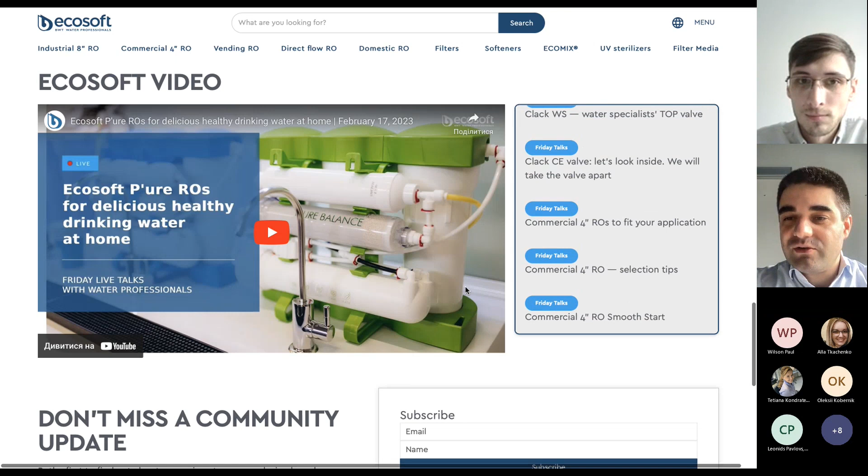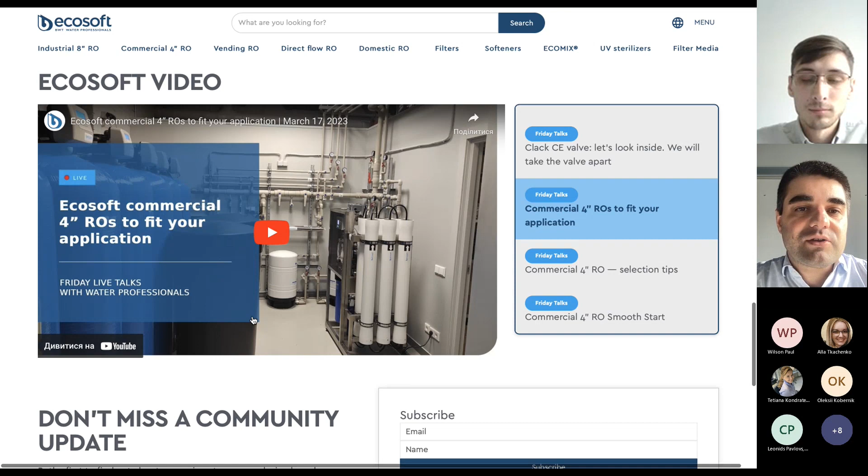Also, we talked a lot on the commercial 4-inch ROs, and you may actually watch these videos here. So this is for your convenience. If these topics are of your interest, you may easily check them out here.

Last time we also talked on the Smooth Start product, so this video will be uploaded soon. And today we will talk on the Robust product line, and I will briefly remind you what the product is. We sometimes also call Robust the direct flow ROs.

If you go down a little bit deeper in the web page, you will find all the family here. The flagship product of this product line is the Robust Pro. This is the product designed to improve the taste of coffee. This is the reverse osmosis filter with special mineralizing technology, which provides calcium, magnesium, and hydrocarbonates to the water. These three minerals help to improve extraction of tasty coffee compounds from the coffee beans. This is a super product that also meets the requirements of the Specialty Coffee Association, and it's the best choice of the barista.

Then we have Robust 1500. This is the product for cafes and cafeterias. Then we have Robust 3000, the product for large restaurants. We also have Robust Mini, the product for small cafes and also for areas with a limited budget, but they want to have enough water for coffee brewing and for tea.

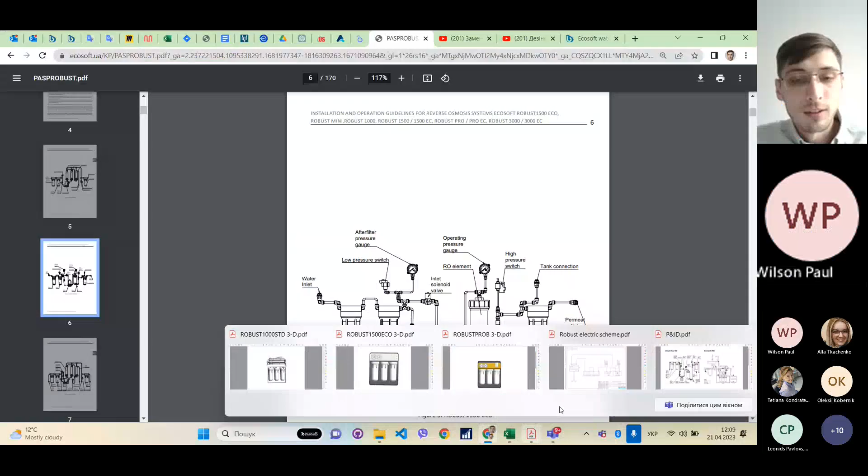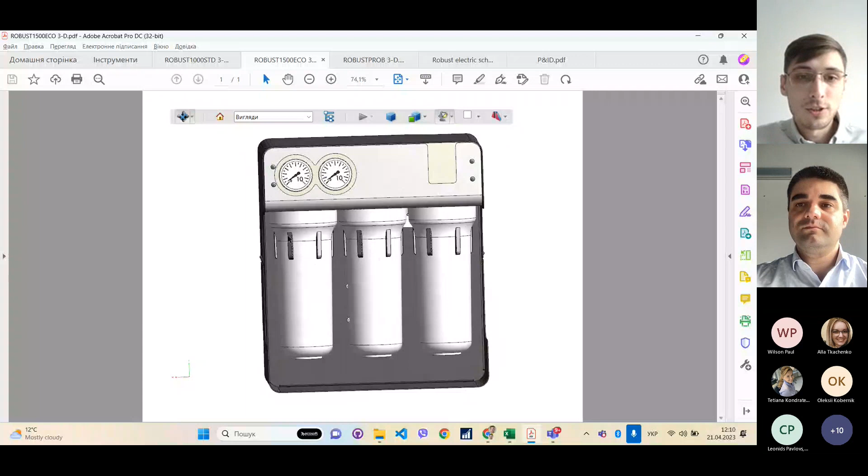So what is the product, what is inside the product? I would like to show you the 3D model where we can view all the components of the system. In the Robust system, we have pre and post filters on the front of the system and pressure gauges. The system also has a more powerful membrane in comparison with domestic RO, and a pressure pump. On the top we can see the connections for pure water, drain, and pressure tank.

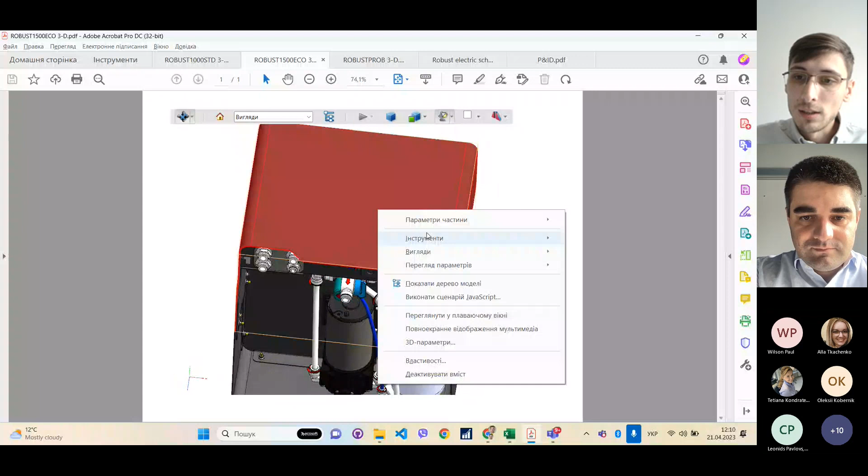For example, let me show you the top of the system. Alex, I will be interrupting you and asking some small questions.

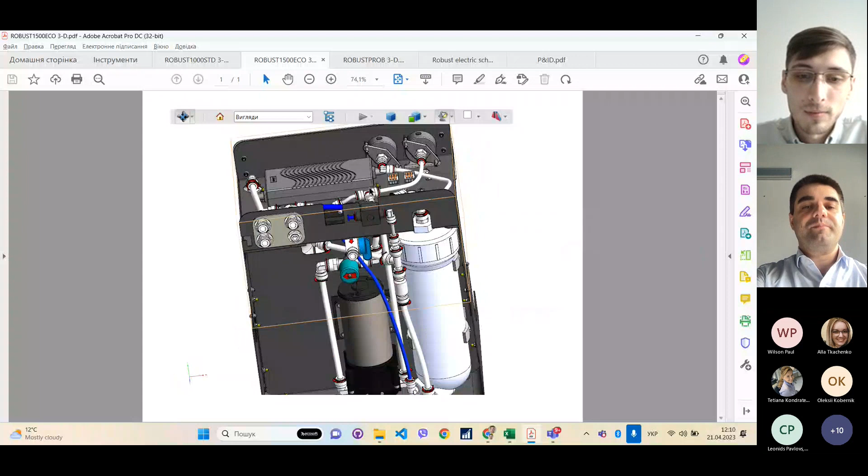Can you tell us what kind of membranes are used in Robust products? In Robust products, we have a 500 GPD membrane for the Robust Pro model, for Robust 3000, and for Robust 1500. These membranes are more powerful and give us more flow rate.

If we compare this direct flow filter with domestic RO, we can install this filter without the tank if we need to supply water to the consumer just for drinking. But if we install the system in the kitchen and need to connect the Robust to other equipment, for example a coffee machine or ice machine, we need to add an additional pressure tank and connect it here.

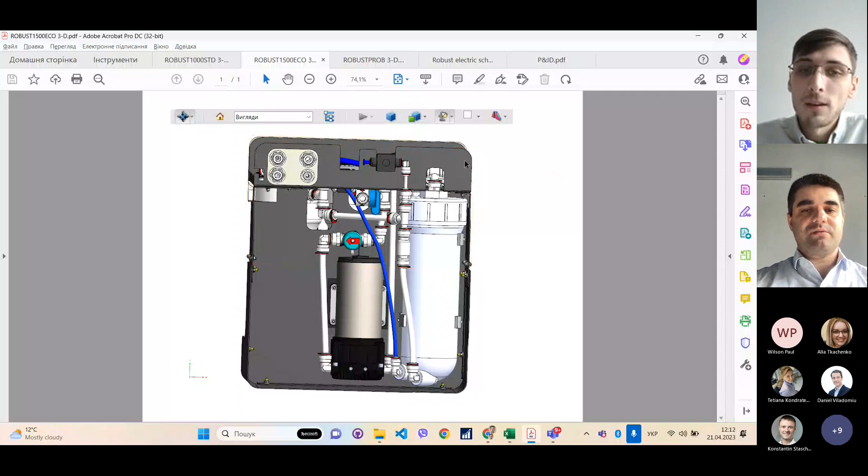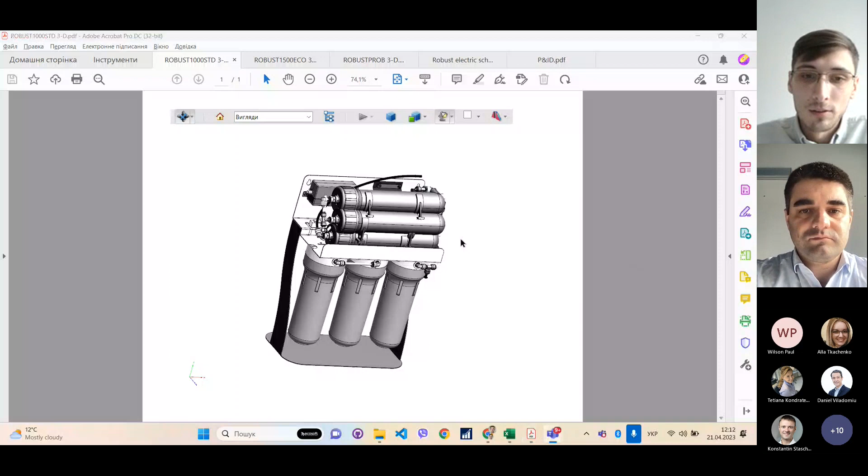What kind of membranes do you use in the Robust Mini? In Robust Mini, we have 3 membranes with 100 GPD flow rate each vessel. The first two membranes are installed in parallel, and the third membrane is installed after the two membranes. The flow rate of this system is about 1,000 liters per day.

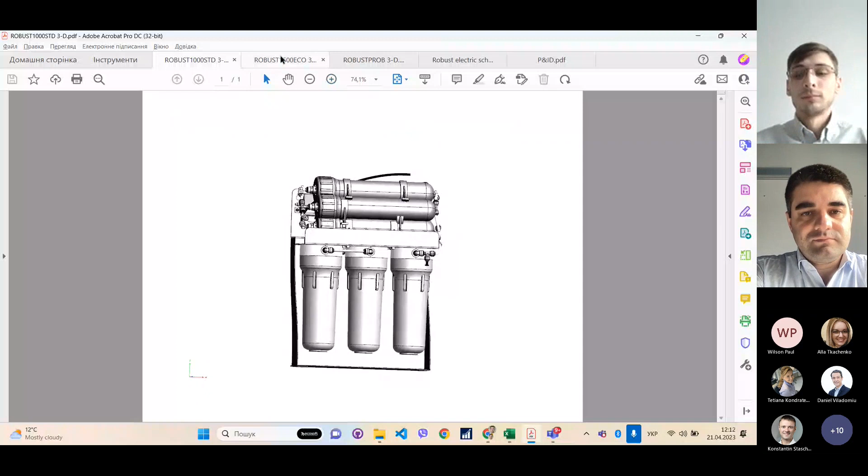Let's go back to the comparison of this filter with domestic RO. I'll show you the P&ID scheme. Very often our customers, when they look at the Robust and see the 3 housings, think these 3 housings are exactly the same as in domestic RO, but in fact it is not like this. Could you please explain what the flow diagram is in the Robust products and how we can compare it to domestic RO?

In domestic RO, we have 3 pre-filters before the membrane, and then we can add some cartridges after the membrane, like a mineralizer and post filter with carbon. But in the direct flow Robust filter, we have 2 pre-filters with sediment and carbon filter to remove particles and chlorine and reduce organics, and then we install only 1 carbon filter here. Let me show you where we find these three cartridges on the 3D model. Here we can see the two pre-filters from left to right, sediment and carbon filter, before the membrane, and on the right side we see the post filter with coconut carbon cartridge.

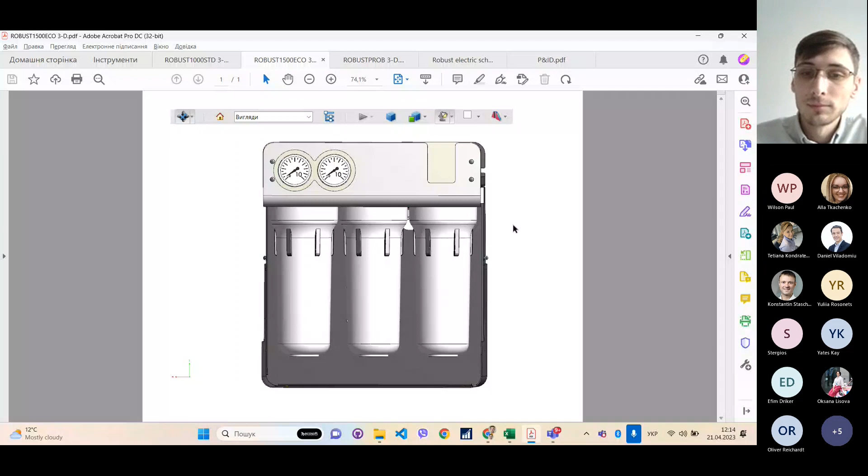Given this difference in the flow diagram, can you explain how we connect the tank, and what is the benefit of having the carbon filter as the last stage?

In all Robust systems, we can easily connect the pressure tank. I would recommend purchasing our Robust kit, which helps you connect a 4-inch tank to this system. We prepare the flow diagram to connect the pressure tank before the carbon filter.

Why do we do this? Because when water stays in the pressure tank, it can develop some taste or smell issue. We need to remove this smell and taste, so we install the carbon filter after the pressure tank, and it helps fix this problem. We recommend installing the pressure tank after this special connection in our system, as it helps improve the taste and flavor.

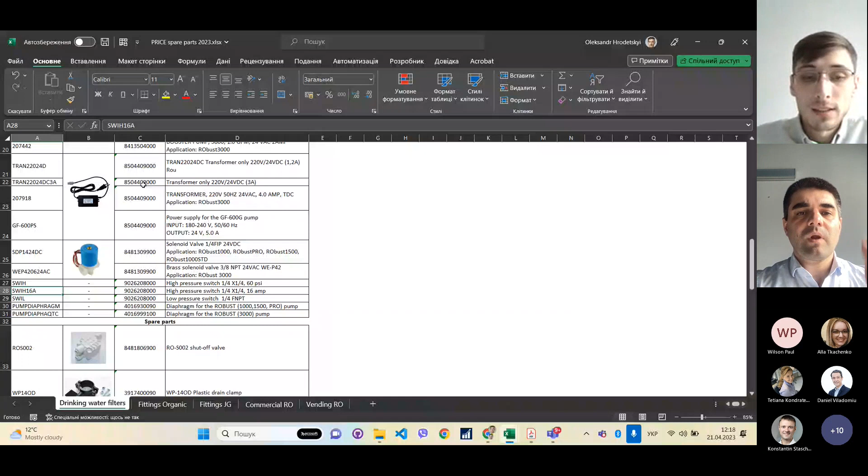The second reason to install the high pressure switch in a Robust system is because we install this system in a kitchen and connect it to additional equipment like an ice machine, and this equipment needs an inlet pressure of about 2 bar or more, so we need to fill our pressure tank more than in a domestic RO.

For example, if we fill a standard pressure tank with air to half a bar in domestic RO filters, when we connect this system in the kitchen we very often fill the tank with air to about 1 bar. This is the second reason to install the improved high pressure switch in the Robust.

Alex, can I ask you, maybe your connection is not good enough. Can I ask you to switch off your camera? Then we would have better sound, because sometimes we have interruptions. So let's try it this way.

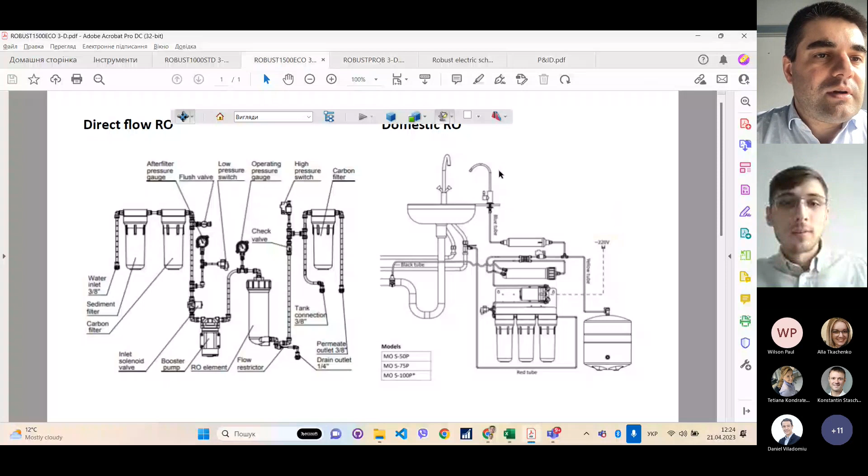For example, the first pressure gauge, installed after the prefilter, needs to have between 2 and 5 bar of pressure. If the pressure is less than 2 bar, we need to check the inlet pressure before the prefilters. For example, if we install a pressure gauge before the prefilters and one after the prefilters, and open...

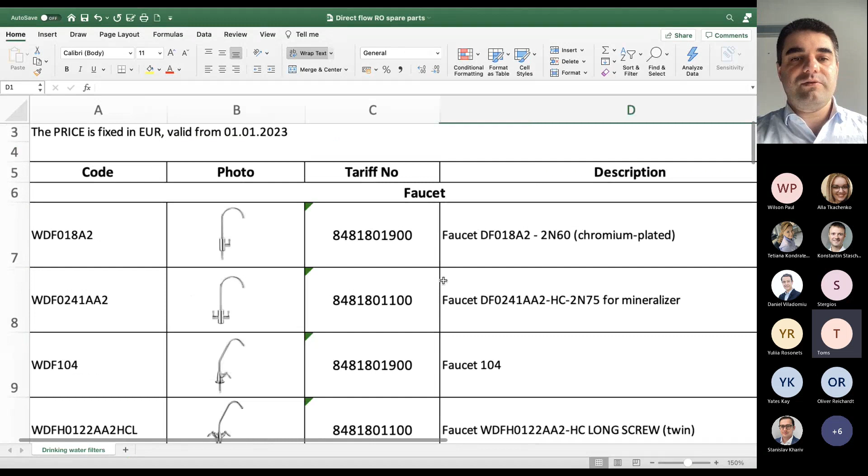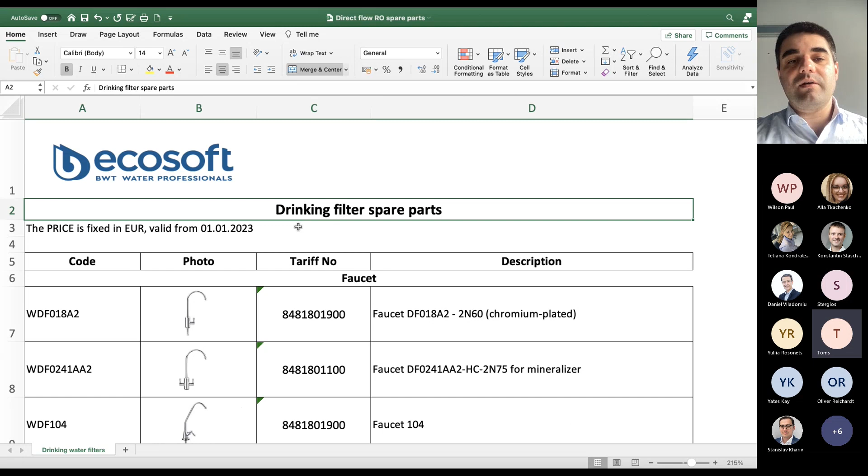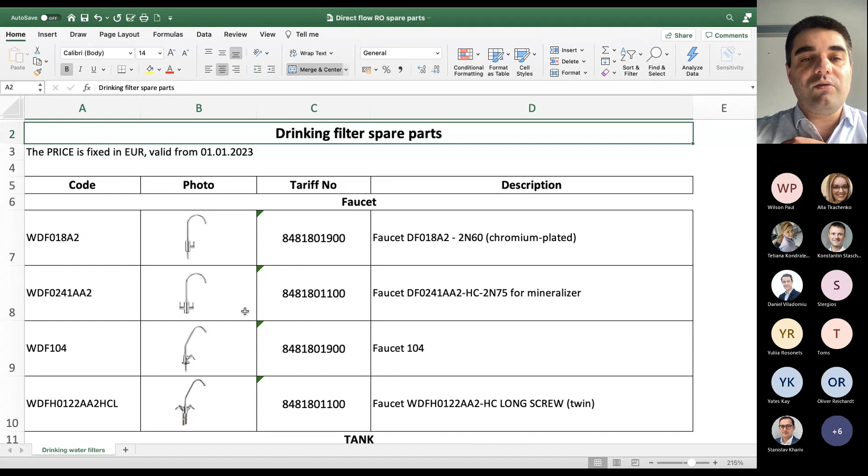While Alex is changing his location, I would also like to cover a very important topic on the Robust filters, but not only Robust filters. We have a special price list for drinking water filters, and in this price list you may find all the required components you may need for maintenance of drinking water filters, like domestic ROs and the Robust family. So I will briefly cover what we have in that price list.

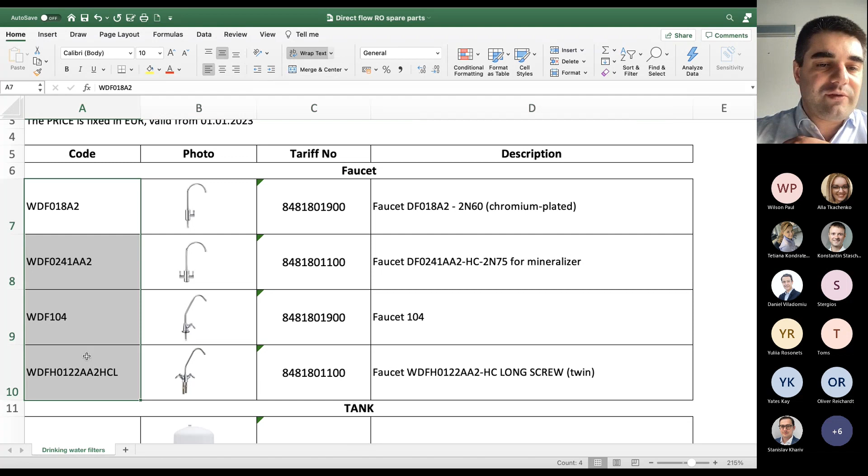So we have all the faucets we use, and we have these codes that you may order.

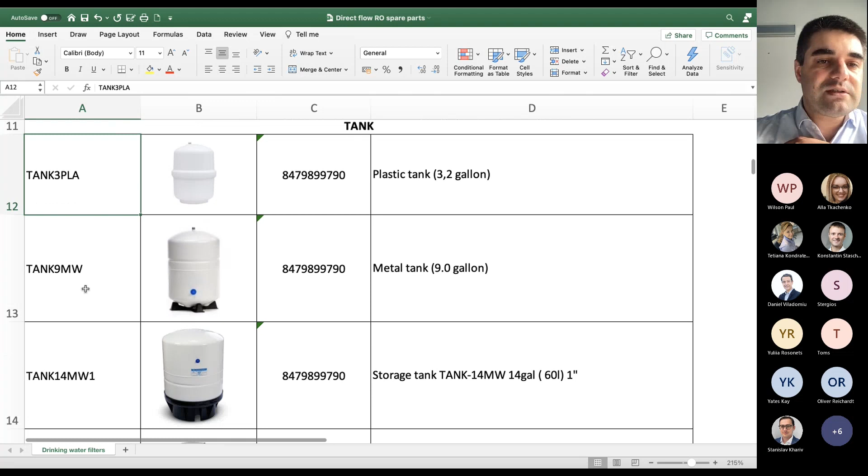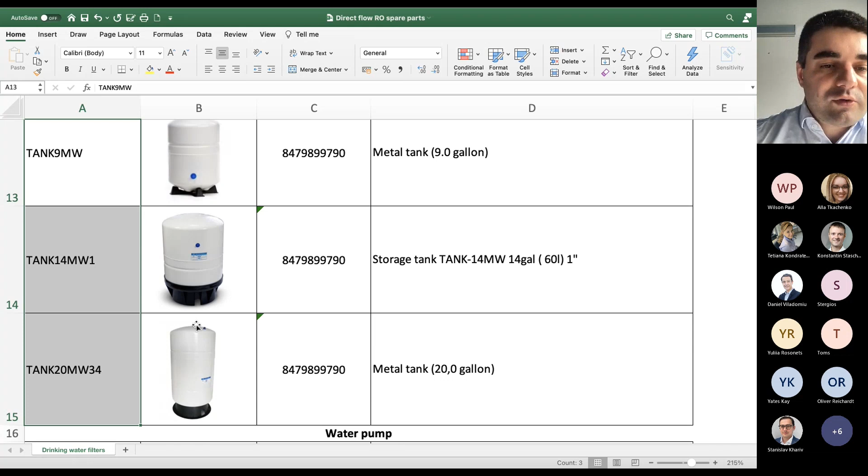Then we have a variety of tanks. Basically this is the domestic RO tank, but we also have 3 types of tanks, like 9, 14 and 20 gallon tanks that we often use for HoReCa applications. These are very nice tanks designed for reverse osmosis water, and they are very often sold together with robust units.

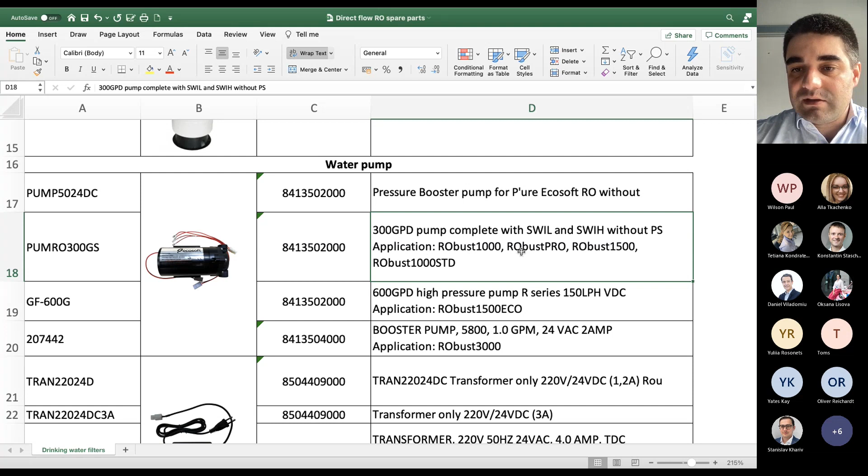Then we have a variety of pumps. Every pump has its description, so you may select the right one. The first one is for domestic ROs, the second is 300 GPD. This is the pump for the robust 1000, the robust Pro and 1500. Then we have the 600 GPD pump for robust 1500 Eco, and the pump for robust 3000.

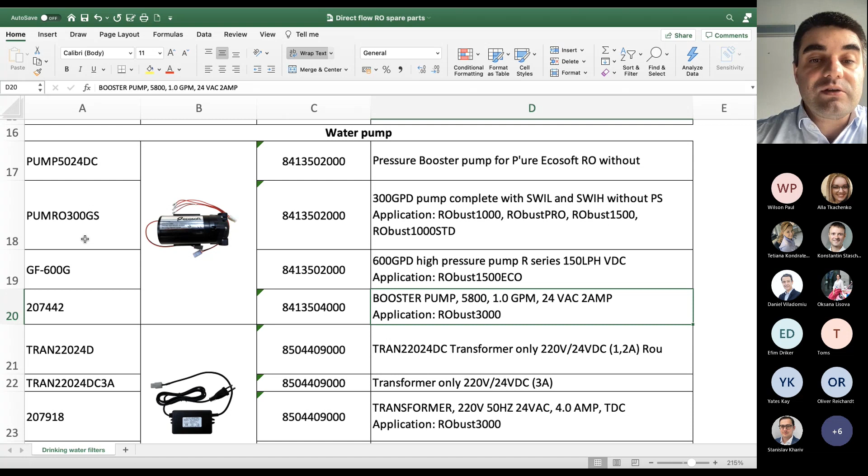So basically, if you do sell many robust units and do the maintenance, we recommend having a few of them on stock. And of course, the power supplies for various pumps.

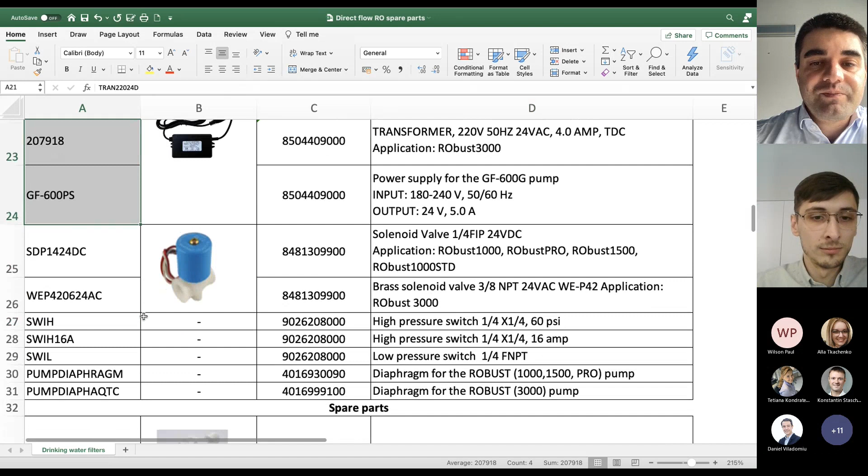Also the solenoid valves, with the description of where it is used in the robust. The solenoid valve is something we really require to have at least 5 of on your stock, just in case you do maintenance and they may be out of operation.

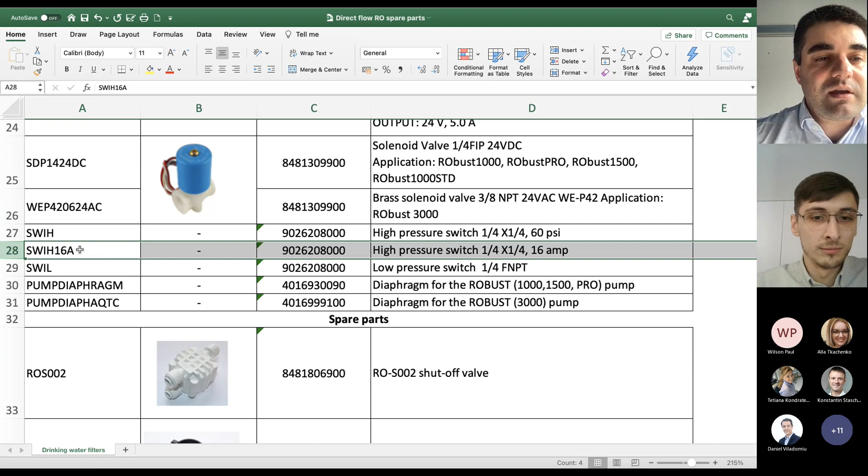The switch, high pressure switch, regular one, and the high pressure switch 16 amps. This is also important - the 16 amp pressure switch is for the robust family.

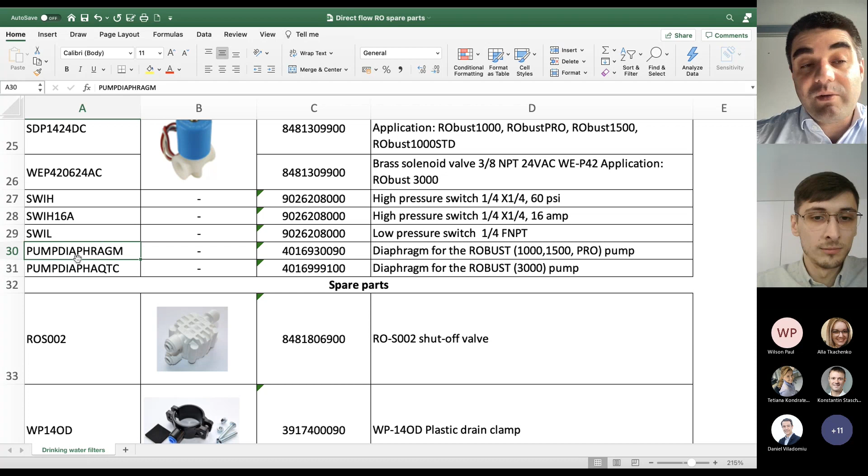The diaphragms - also, I think later today we will talk in the video about how to repair the booster pump, if you want to repair it.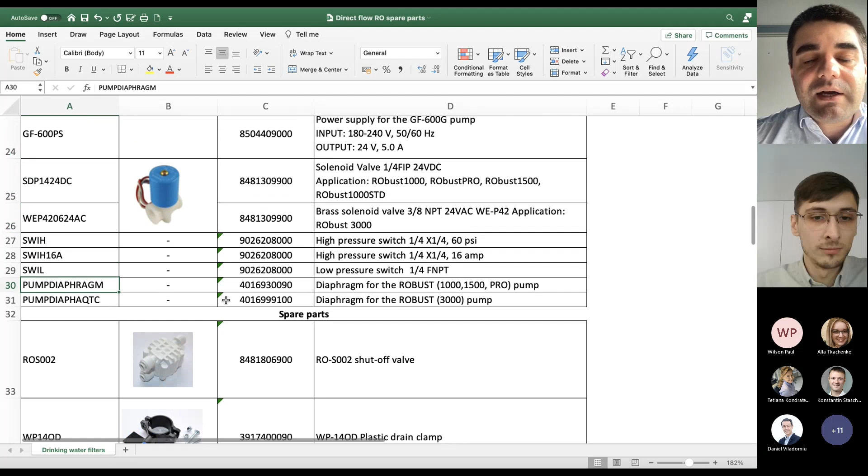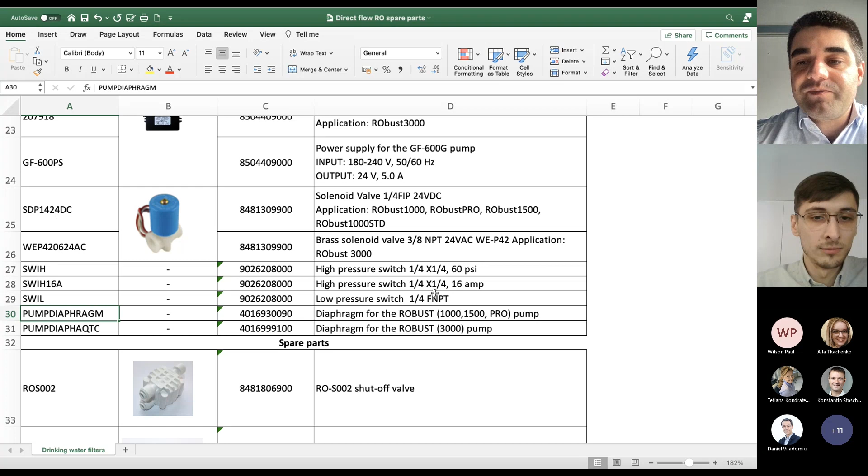What is important - I would not go into detail, but you see there are many small, but important parts. You may contact your key account manager at Ecosoft to have this price list and these codes, and if you need some spare parts, you may place an order just to have them on stock.

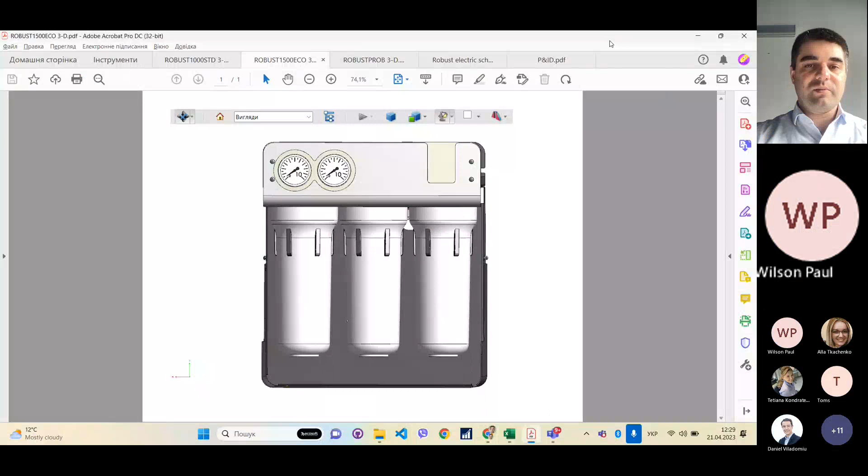So Alex is back. I hope now the connection is good. Well, the sound is good, but the video is not good. Okay, so maybe we can do without video.

I just need to - you stopped on the pressure gauge after the filter. What is the recommended pressure, and what should we do if we are out of this range?

If the pressure after the pre-filters is less than 2 bar in dynamic, we need to check pressure before the pre-filters, and if everything is okay, we need to replace the pre-filters, and it will help to fix this issue. But if the pressure is more than 5 bar, we need to install a pressure reducer for the system to avoid any damage to housing or piping in the robust system.

The second pressure gauge, which is installed after the pump, must be from 4 bar to 7 bar, and this is what we recommend for this filter. If you see that the pressure gauge after the pre-filter shows 3 bar, and after the pump you have 3.5 bar, it tells us that this pump works badly, and we need to replace the diaphragm on the pump, and after that this problem will disappear.

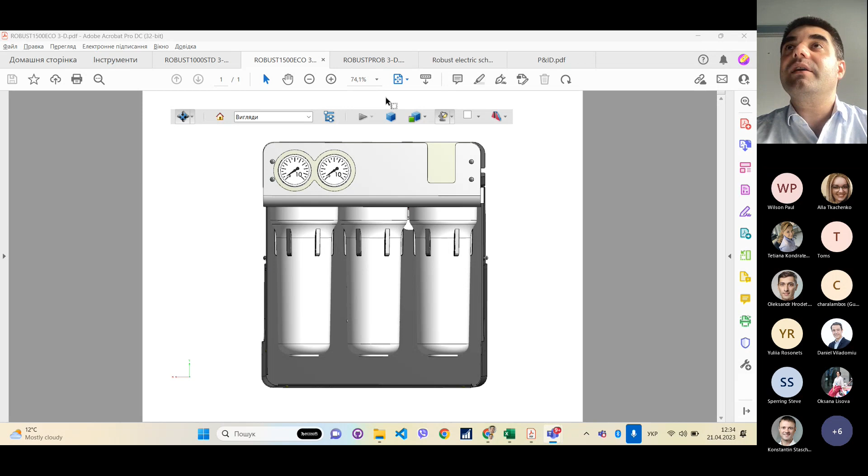And if we divide it by 365, then it's around 400 liters a day. So this is advice for every dealer: if a robust treats 400 liters per day, then every year we should replace the diaphragm of the pump. But if, for example, a robust treats 1000 liters per day, it means we have to replace the diaphragm twice a year, or maybe every 5 months. This is also important to mention - if you install a robust in a place where it consumes a lot of water, you have to prepare yourself to do the maintenance more often.

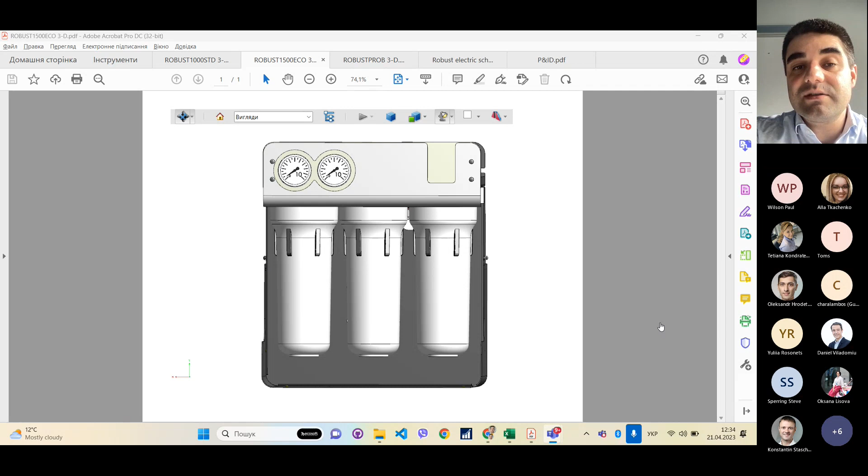Alex, can you please - I know we have a nice video on how to replace this diaphragm - can you explain how to do it and where we can find these videos? Yeah, one moment.

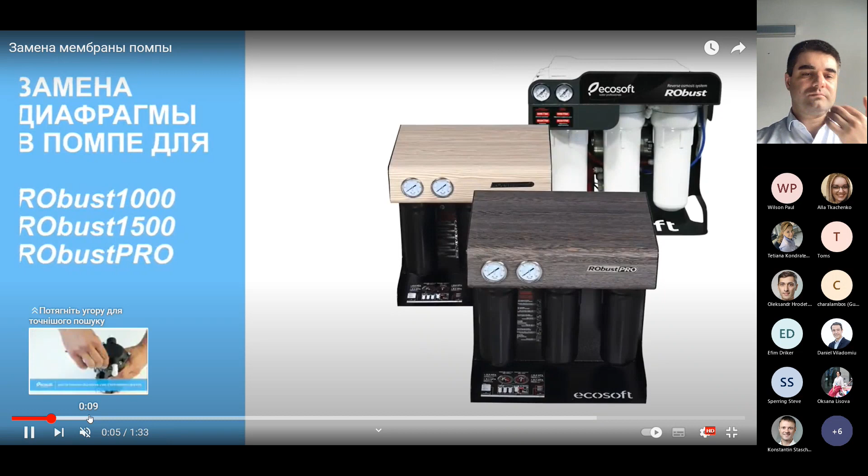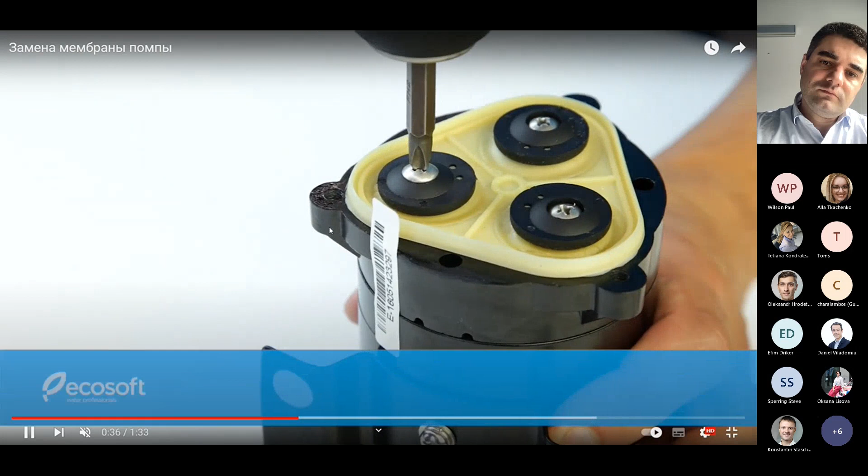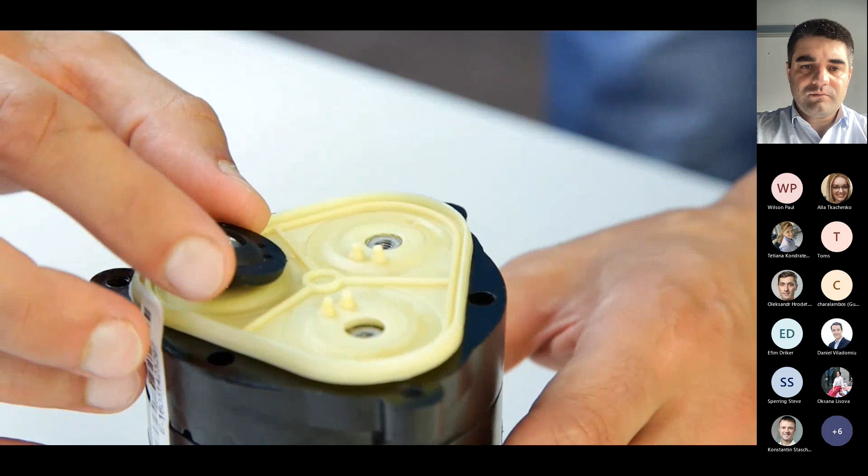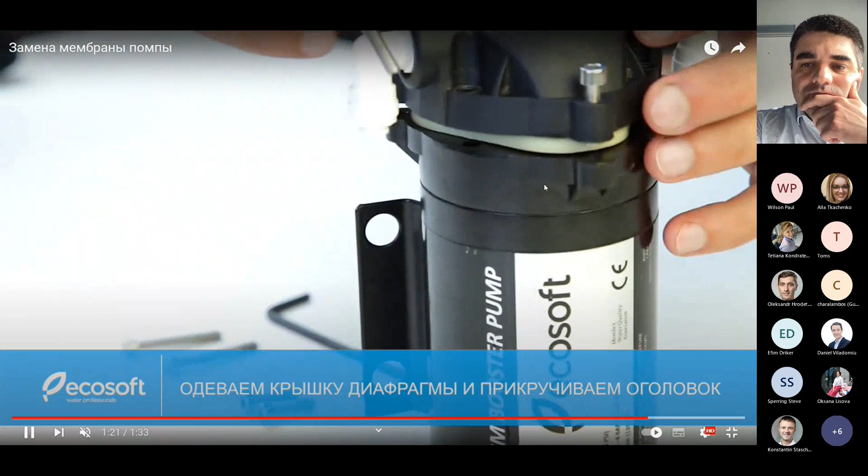We need to unscrew all the screws from the cap of the pump, then unscrew the screw inside the pump and change the diaphragm. We need to do this in 2 cases: when the system does not increase the pressure after the pump, and if you have some leakage on the pump. It means the diaphragm is damaged, and the replacement will help avoid this problem. This is a very nice video for all technicians, explaining exactly how the diaphragm should be changed.

But sometimes what might be the reason if the pump is leaking? Sometimes it does not increase the pressure, so in this case we replace the diaphragm. But what should we do if the pump is leaking, what does it mean, and what are the suggestions? What should we do in this case?

We have 2 cases when the pump leaks. The first is when the diaphragm is damaged, and we need to change the diaphragm. But the second reason for pump leakage is when the main module has some problem with the O-ring. In this case, if we replace the diaphragm and the leakage does not disappear, we recommend changing the pump. But this situation is very rare. We have had this case in Ukraine and with our dealer in Europe, but it's very rare.

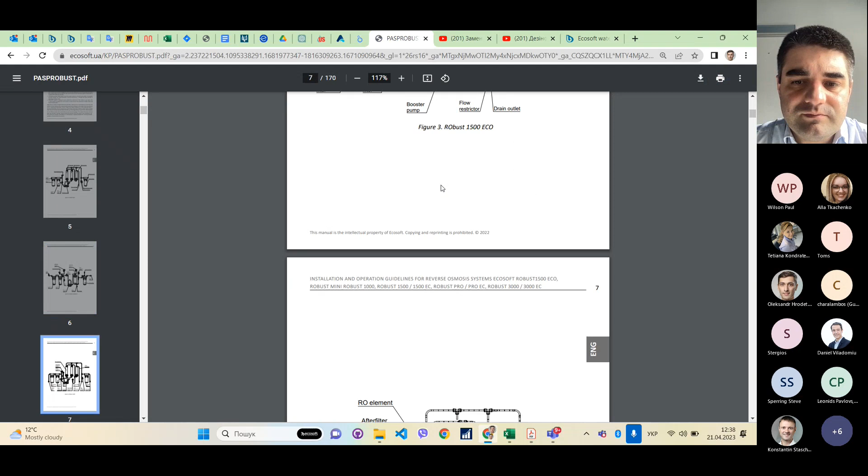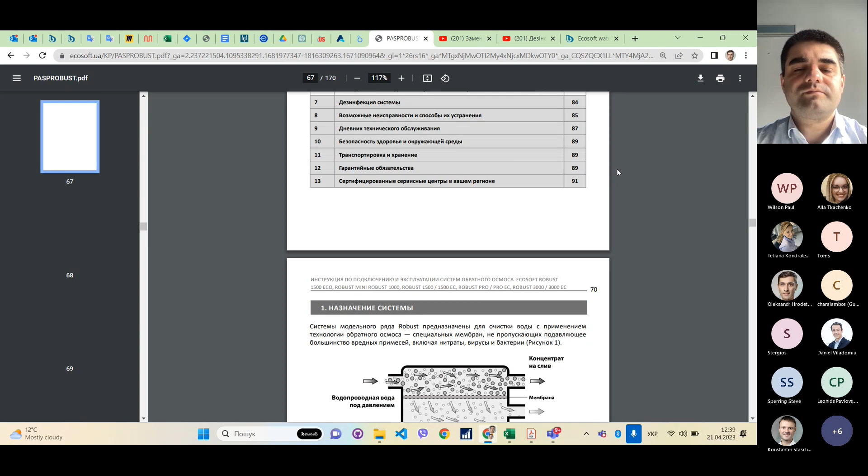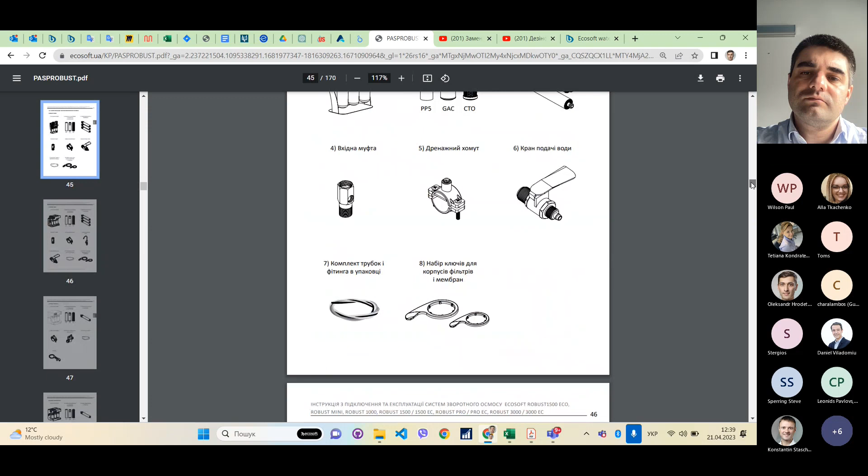Correct, Rusty. First of all, I would show you our manual, where you can find the main problem and how to fix it. On page 26, you can find the troubleshooting table.

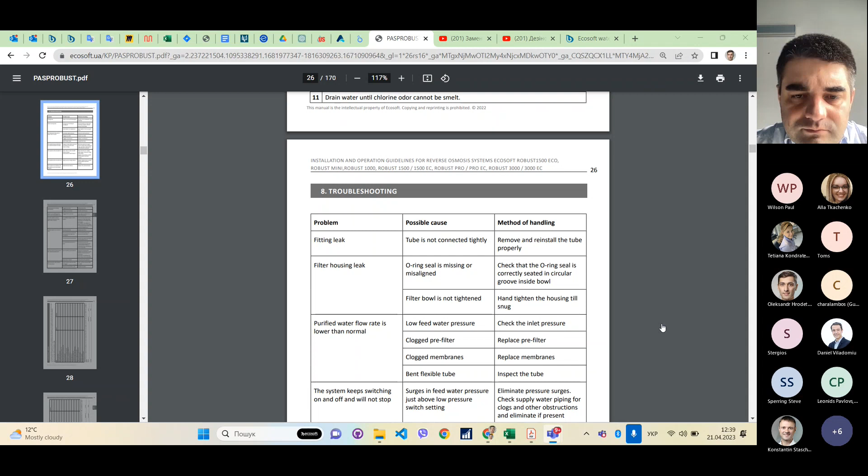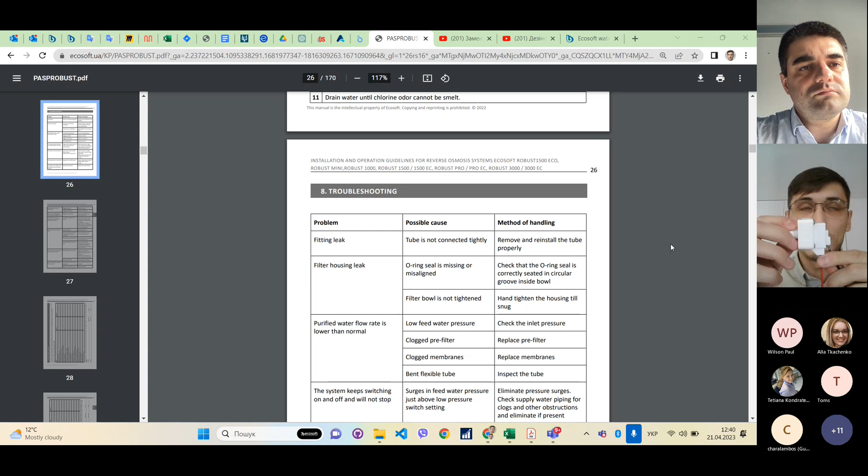If we go back to the main problem, when there's an issue with the robust where it doesn't turn on, it appears when the low pressure switch, which is installed before the pump, is damaged. We need to check how to understand that the low pressure switch doesn't work. We can remove 2 wires and manually connect them like this. If the system starts in this case, we understand that we need to change the low pressure switch.

If you, as a technician, will work with the direct flow systems, we recommend having the low and high pressure switch with you, to easily remove and replace these spare parts on location.

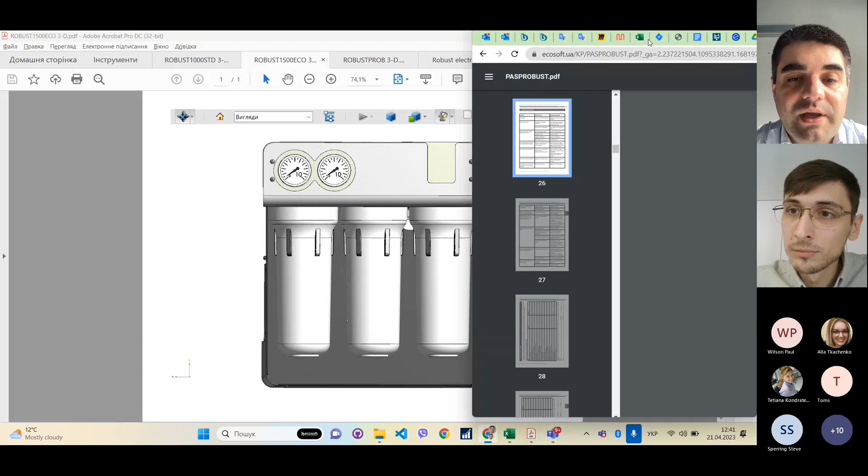It's important to mention here to everyone that in the robust manual we have a troubleshooting guide, and it's very useful. If you have issues with any robust product, you can first go to the troubleshooting guide, check the problem, and see the possible ways to handle them.

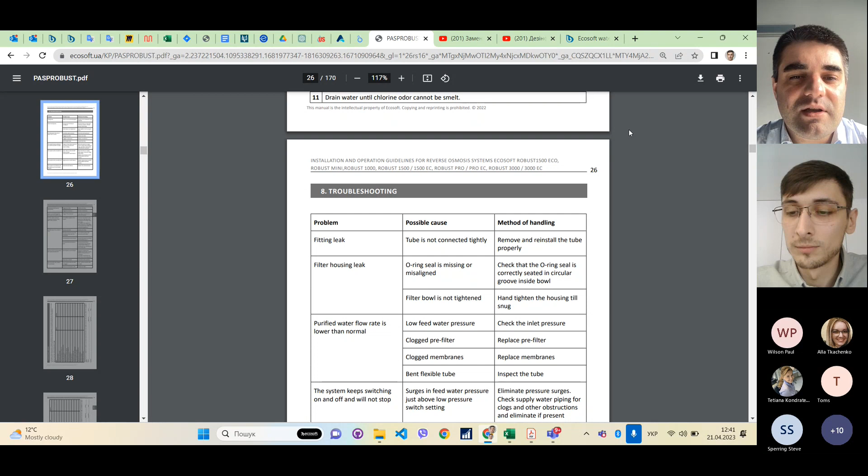Maybe we can also cover some other cases. I know that sometimes the robust is not switching off, so it is operating but it won't switch off. Why is it so? What might be the reason for this case?

For this second issue, I would show you our electric diagram where we can find all our components: the power supply, and the low pressure switch, which is normally open. When we manually connect the wires, we understand that the low pressure switch is damaged.

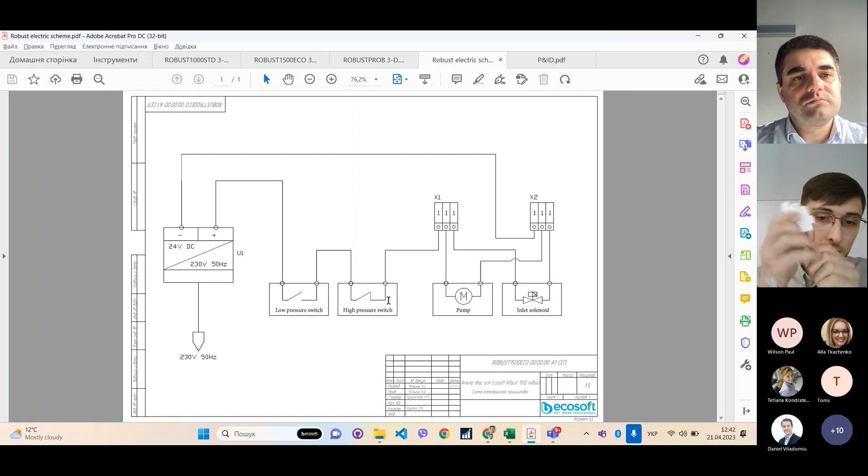If we are talking about the high pressure switch, this sensor is normally closed, and if the system always works and you cannot stop it, you need to check the high pressure switch. For this, you just need to disconnect 2 wires, and then the robust system will stop. In this case, you need to change the high pressure switch, and it helps fix this problem.

Can you explain what is the default or factory setting of the high pressure switch, and what could be the range? I know the high pressure switch is adjustable, so what is the range of adjustment?

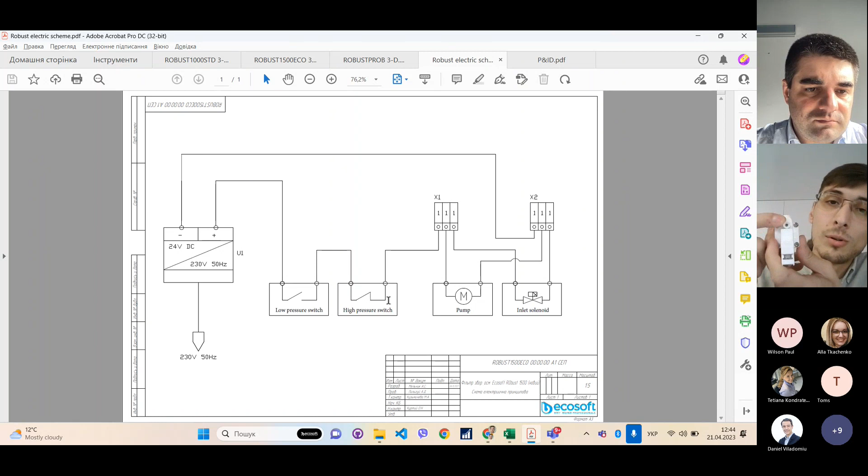The high pressure switch is adjusted at the factory, and each of our filters has a high pressure switch set to 2.5 bar from the factory. But if you need to increase the pressure after the robust system, you need to screw this screw and adjust it. You can adjust the pressure lower or higher, and the maximum we can adjust is 3.8 bar after the membrane. So basically, if the customer is asking us to provide higher pressure, for example for a coffee machine or a dishwasher, we could adjust the high pressure switch and provide enough pressure for the kitchen equipment.

This is important to mention, so that you do not need to install additional booster pumps. You could just adjust it in the right way.

Maybe we can now jump a little bit to the maintenance questions and explain how often we should replace the prefiltration in the units, and how often we should replace the membranes. I remember on the previous Friday talk we discussed this, and we have a question about this point. I would like to show you the table where you can find all information about the volume of each prefilter and each membrane, from Robust 1000 to Robust 3000.

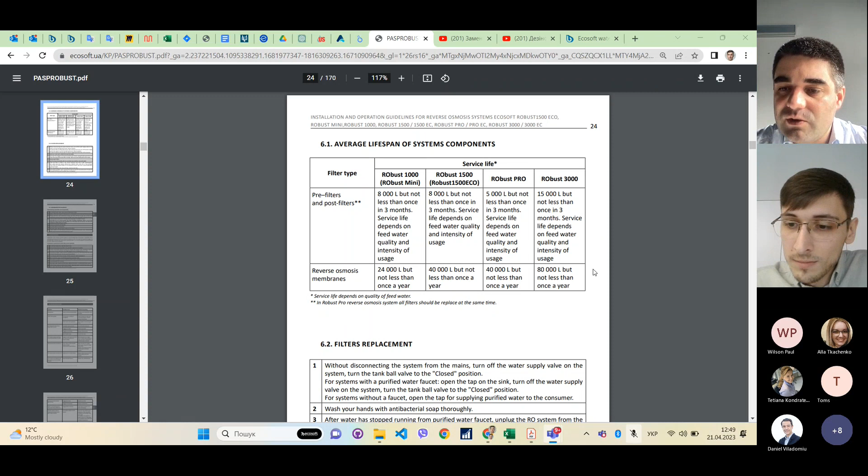We also have a question from Tom: what about the feed water quality? Is the service life meant for city water, softened water, or else? This is a very good question.

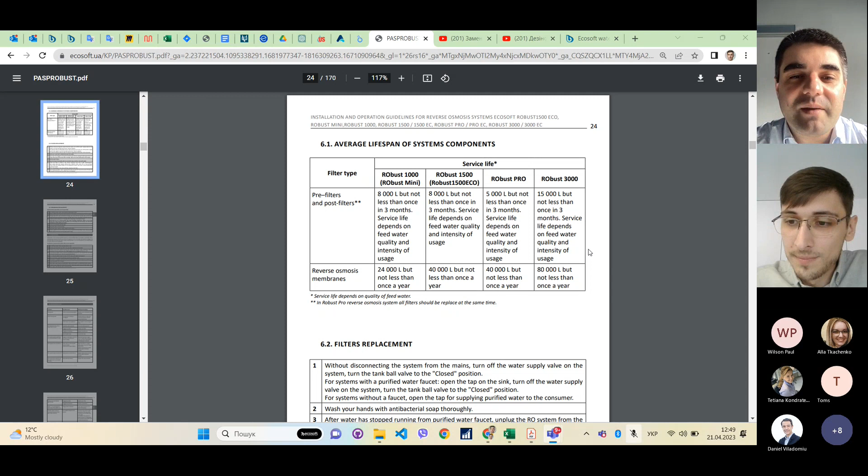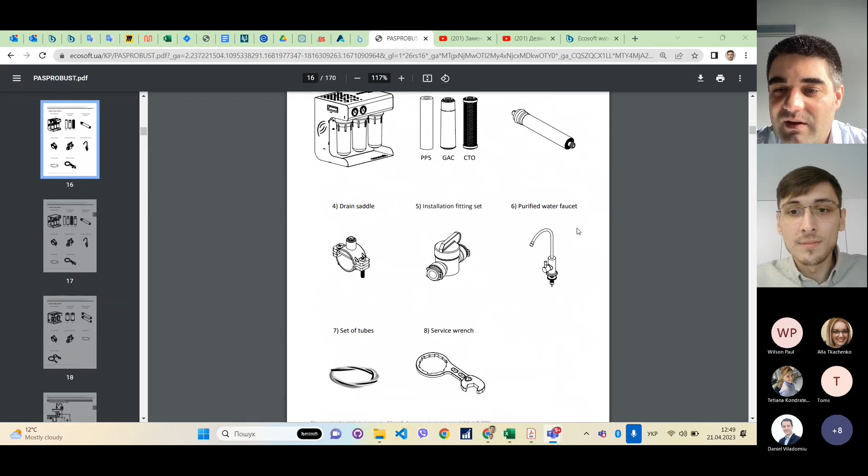If we're talking about feed water requirements, we can see that the water for the main Robust line must be less than 1500 TDS, and for Robust Pro we need water less than 500 ppm, due to the bypass which we have in this system. We recommend checking the TDS every time before installing the system.

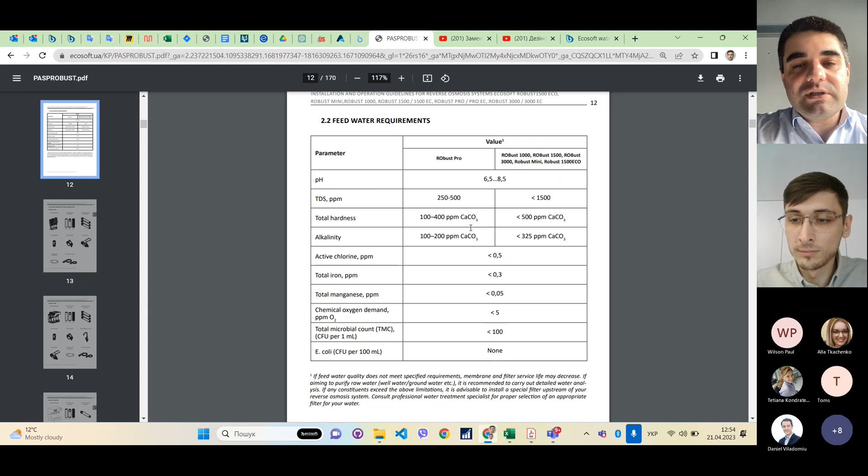So we have already talked on the Robust Pro and the softeners. Can you maybe also, Alex, explain a little bit the recovery question, because what is the recovery and what is the efficiency of water usage in the whole Robust family, and why is it so important for this product range?

It is very important for this product range because it is cost, and we install this system in HoReCa segment, and every time people need to reduce the cost of the water. For our Robust system, we have a recovery more than 50%. For example, in Robust Pro, we can see that flow capacity is about 70 liters per hour, and waste about also 70 liters per hour.

But I would go back to the Robust 1500. This Robust provides us with higher recovery, about 60-65%, and we have a flow rate for flow capacity about 90 liters per hour, and waste about 50 liters per hour. And in my opinion, it is a crucial benefit for this product line for consumers, and you can say about this point to each of your customers, and sell this benefit to the consumer.